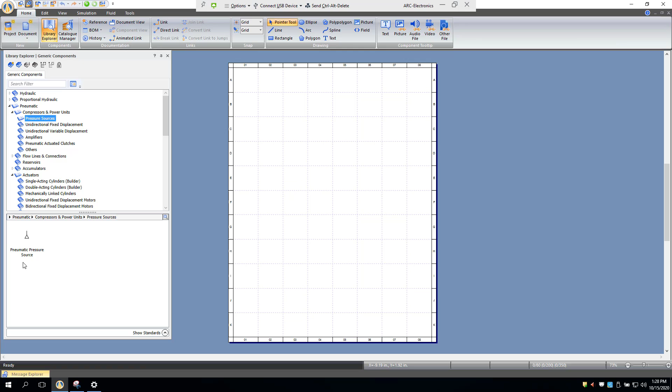Okay, the next thing we want to do is go into our Library Explorer. And we're going to go down to pneumatics. So we're going to open that up. Let's close out hydraulic here, so get out of the way. And the first thing we're going to do is we're going to go to compressors and power units, and we're going to grab a pressure source. And it's the only one here, and let's grab it. Let's zoom a little bit and get there we go.

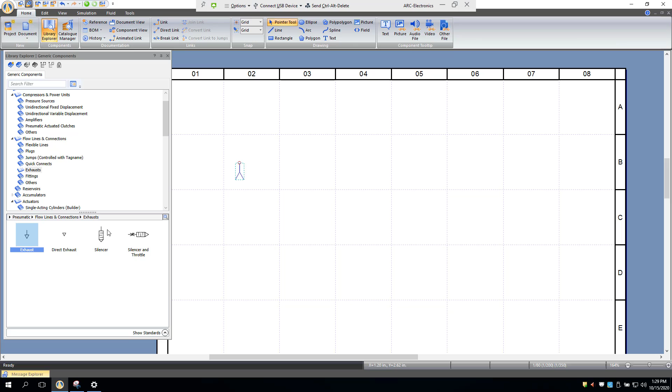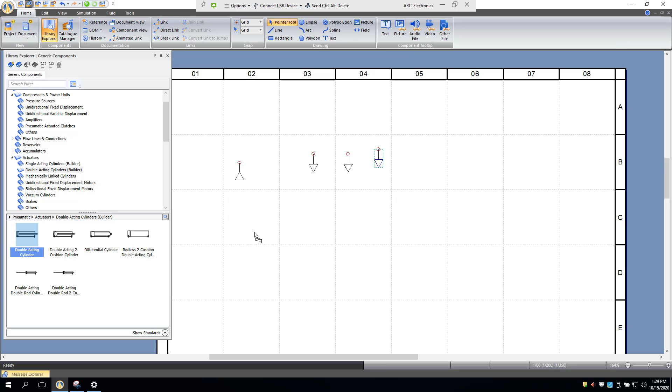And the next thing we need is an exhaust. So we're going to go to exhaust under flow lines. Here we go, and connections, and we're going to go to exhaust, and we're going to grab 3 of these. Good. So the next thing we're going to do is we need a double acting cylinder. So let's go to actuators and double acting cylinders builder, and we're going to grab this one right here. We may need to modify it, but that's a good start.

And let's go to directional valves, and we're going to need a 3/2-way normally open, and this one here is close to the one we're going to use has the right boxes and return spring. So we'll use that one for right now. And we need a 5/2-way. And I think this one's probably close to the one we're using.

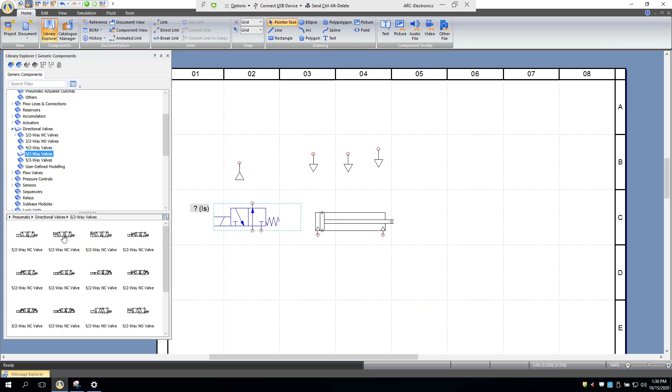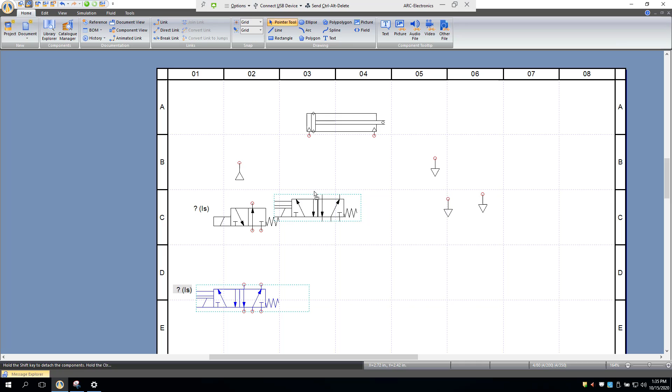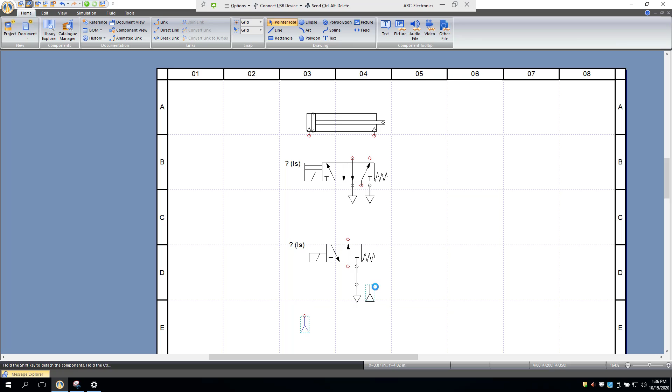Good. Now that we have all our components here, let's arrange them how the drawing showed after we close out of our Library Explorer. So our cylinder's up on the top, and we're going to have our 5-way valve here, and our 2-position valve here. And let's go ahead and put our exhaust on. Good, and they connect. So there's our exhaust ports. Good. And our pressure should go down here to this one. Good.

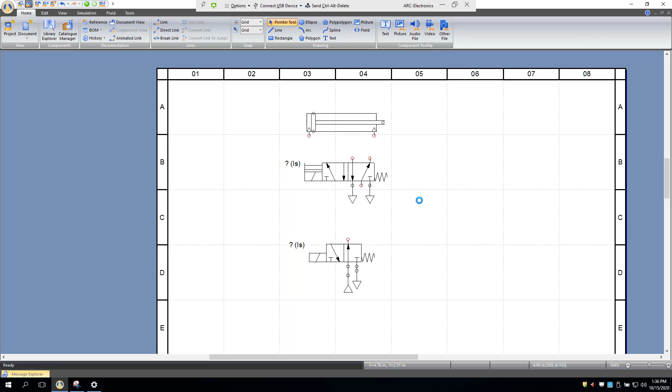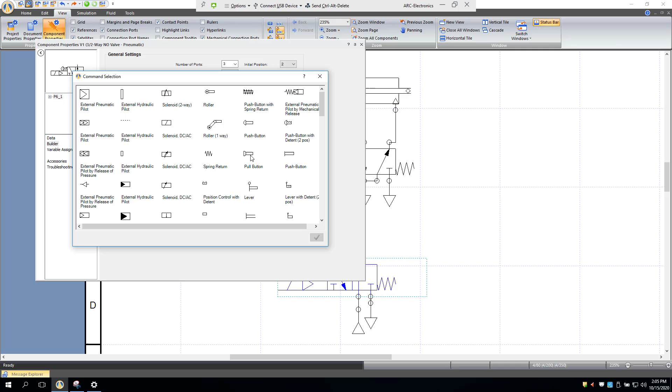So let's go to our piping. Okay, we're back. Let's go ahead and zoom this out. There's 2 ways to do that: zoom window or zoom all components. Good. And we have to modify our bottom valve. It's missing some pieces. So let's open it up, and let's go ahead and delete that. And delete that, and we're going to go back to the question mark, double click on that, and we're going to grab a push button and click the green arrow check mark, and good, we have the component we need.

So let's go ahead and simulate. So we're going to go to simulation, normal simulation. Okay, and what we have here, let's go ahead and unclick that. And what we have, red is pressure, and blue is exhaust. And when we push this valve, the button here on our valve, it moves over and we turn the system off.

Okay, so let's power up the system here. Let's go ahead and click this side. First, let's click it. There we go. Now this valve is held in that position, which is off. Now let's click it into the on position. Now we have pressure to our next valve. And this is a solenoid, which we'll power later. This is a spring return, so we could push this one also.

Okay, so right now our cylinder is retracted, and if I click in this one, it's going to be extended. So we have pressure here up against this piston, which pushes our rod forward. If I move to this side, we have pressure on this, and the other pressure gets released back to the exhaust valve.

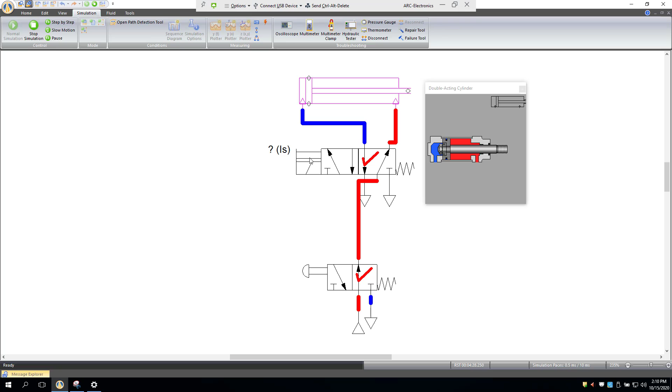Okay, let me show one other thing. So if we go up to one of the components and we right click, go to animation, we get a little cross section here. So let's unclick this, and there's it retracted, and let's push it forward, and now it's extended. And you see the red is pressure, blue is exhaust. So let's go back the other way, and the cylinder retracts and extends. Unfortunately, the valves don't have that same animation.

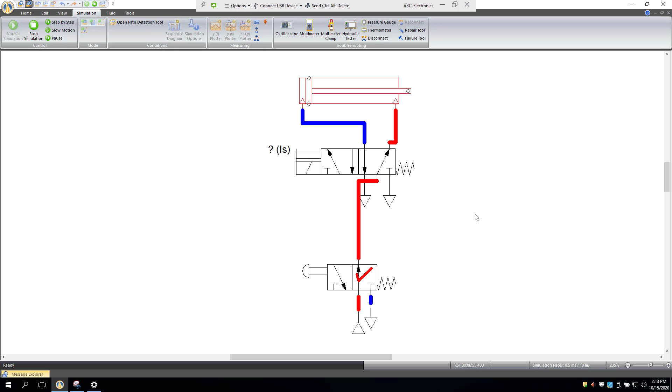Okay, let's talk about the valves here. So let's get out of our simulation, and let's go to view, and let's zoom in to our lower valve here. This here is a pneumatic valve. It is a 2-position. The boxes are the positions. And when we push this button, it slides over here. And when we let go of the button, the spring returns it. So it's a push button, manual push button with a spring return. And this is a 3-way valve because we have 3 ports.

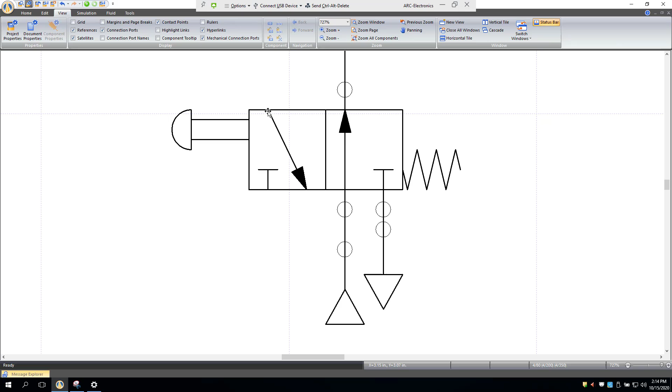Okay, in this one, the arrow shows that the pressure is going to pass through, and the exhaust port is closed off. Okay, when we go to the other side here, the pressure is closed off, and we have a return path for our exhaust.